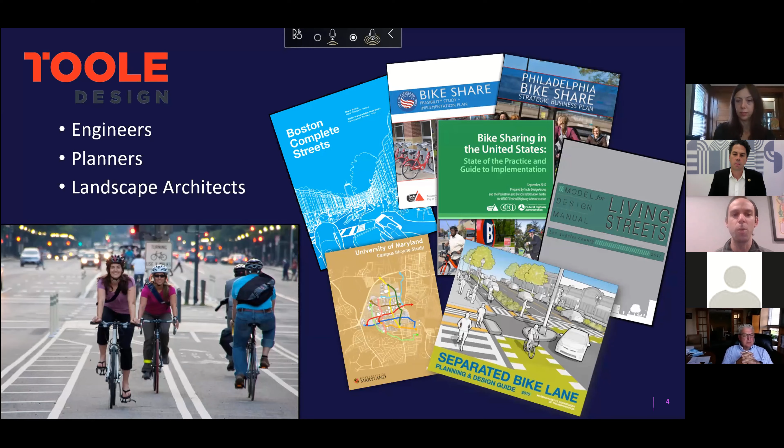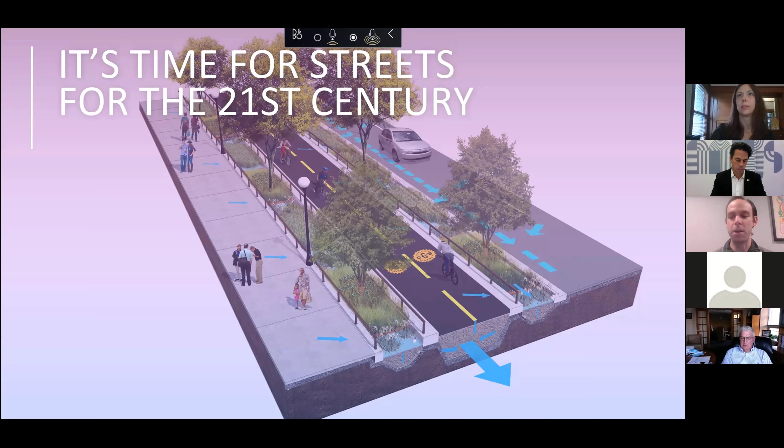Our company, we're engineers, planners, landscape architects. We write a lot of the guidelines and work all over the country, really imagining what can be and then getting it built at all different scales. We do this all over the place, and really it's about making streets what we would consider the 21st century. So it's not about cars, it's about pedestrians, it's about the retail environment. It's also about stormwater and utilities and being better stewards for the environment as well.

Just 4 things I was going to touch on today, really fast: designing for people, integrating green infrastructure in your streets, a few design tips, and then I've always got to do a plug for bikes and peds. For designing for people, it's really about balancing getting somewhere with being somewhere.

I just got your list of towns. I did some Google searches as well, and I picked 3 projects that kind of fit some of the things. One of the easy ones was South Bend, Indiana. Many of you are probably familiar with it. We actually were hired to go there right when Mayor Pete was elected.

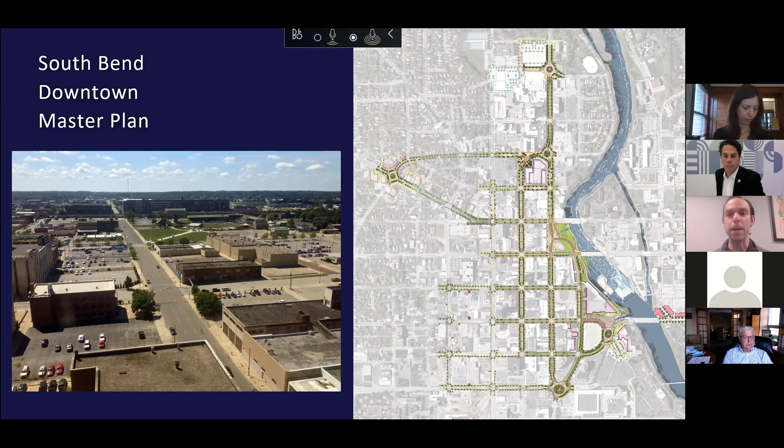When we got there, the picture in the bottom left was basically what their downtown Main Street looked like. We've worked with them for a few years getting their downtown master plan together. You see on the right, where we two-wayed all their one-way streets, and they did road diets and different things to humanize those streets so that streets that were like this before could be transformed to be, again, for people. It's got bike and pedestrian facilities.

It's a calmer street for cars and safer for cars as well. And then, as you can see, the reinvestment came back into their downtown. So if you go there today, it's a much different place 10 years later than what it was when we first got there, and they've just continued to grow the plan as developments come along.

Another town is a small town in Sulphur Springs, Texas, a couple hours outside of Dallas.

When we got there, the picture on the left was their Main Street, and the upper right is the way it looks today. That was the first project we did there. We've been going back to Sulphur Springs about every year or two to do different projects for them. And one that was always bugging us was their square around the courthouse that you see in the bottom right.

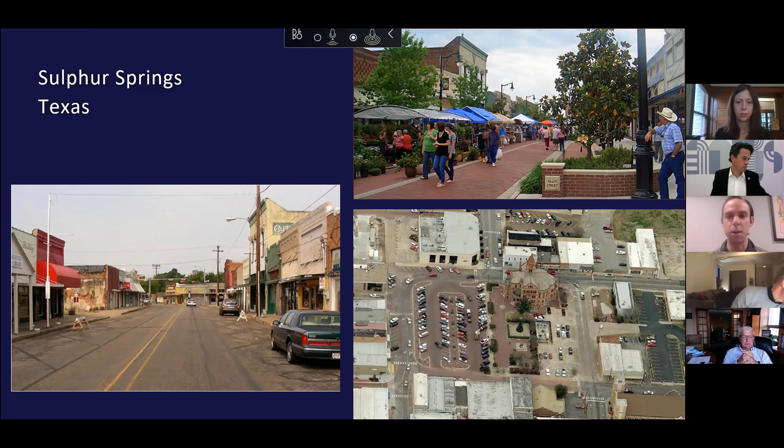And they had a one-way couplet that went through their downtown. As I mentioned, we don't really go to a town unless we remove their one-ways. So we did a quick plan, we did a SketchUp model, we did some concepts, and they built it. And so they restored those streets to be 2-way. We've got lots of tricks. It's not an easy thing, not a snap of the fingers, but we've been around the block, so we've got several tricks of

making one-ways to 2-ways and making great places. And so this Plaza Court Square area that you're seeing, there's no curbs. There's the little parking blocks, but it's a curbless place, so that when you have events and things there, they can shut the whole thing down and have events there.

And so this town that was dead, literally, when we got going there, gosh, again, it's probably 10, 12 years ago when we first started working there, they have over 300 events a year. And it became a place where people didn't say, oh, what do you want to do tonight? Or should we go downtown? They knew if they went to the downtown square, something was happening. So they didn't have to question it.

And so that main street that was empty, as you saw in that after picture, filled up with restaurants, filled up with new stores and retail, and this place is hopping lots of most of the nights of the year, and it's become a destination for people even in places like Dallas to go to on the weekend, on a Friday night, to not have to deal with Dallas or Fort Worth traffic

or anything to actually enjoy Sulphur Springs. Another one, and this was just based on seeing the square there in Shelbyville, a little place called Carrollton, Georgia, where there was a square called Adamson Square. And it's another one where you're doing a lot with a square. Been to Franklin, Tennessee, and done different things there. Racine, Wisconsin's another one that's got a funky downtown square.

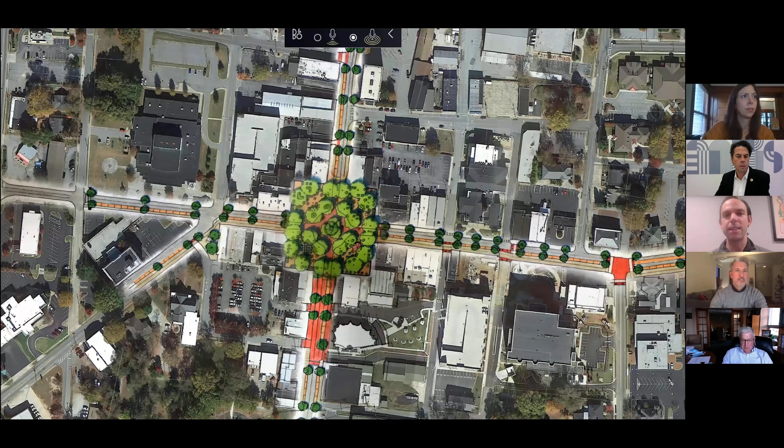But we came in, looked at it, did a quick plan for them. It hasn't been built yet, but we've been still working with them. And here we kind of blew the trees off. It's one of those things where you do a nice plan, you see a lot of green. The images on the left kind of show the transportation functions with the street coming in, how we redesigned it.

And just the big idea was reimagining the corners as rooms. So things like beer gardens, having outdoor dining, things like that, would have been—I wish they had built it 3 years ago when we drew this. They've been getting funding because now in COVID, this would have been perfect to have this much outdoor space next to their square, to be able to have, during this time, outdoor dining and activities.

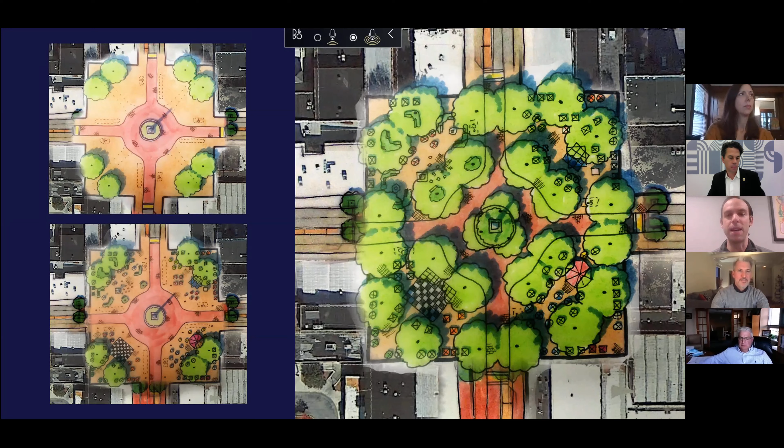But either way, it's still the vision, the town's still pushing for it, and it's something to strive for. So again, it's just one of those things of investing in that public realm and not just giving everything necessary to the cars in these places.

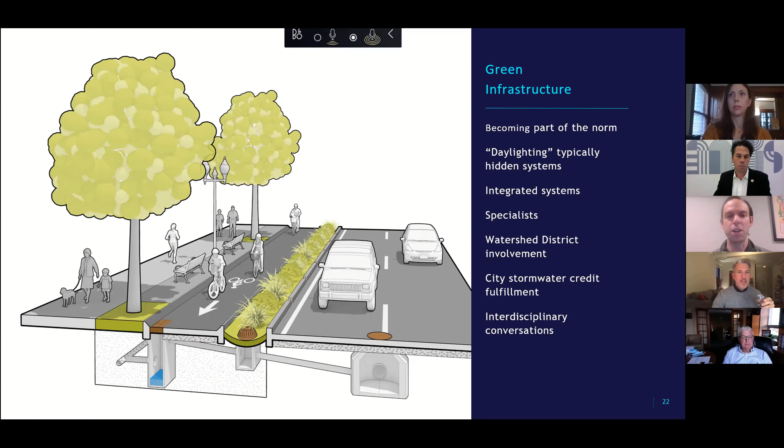Again, green infrastructure, most places are already doing this. We integrate it into most of our projects just because it's an extra funding source that you can also get. And it just helps your infrastructure. A lot of places have dated infrastructure, and stormwater, as far as having something that can reduce the impact of that with projects always seems to help. So we always encourage that and just sell it because it's also an economic thing.

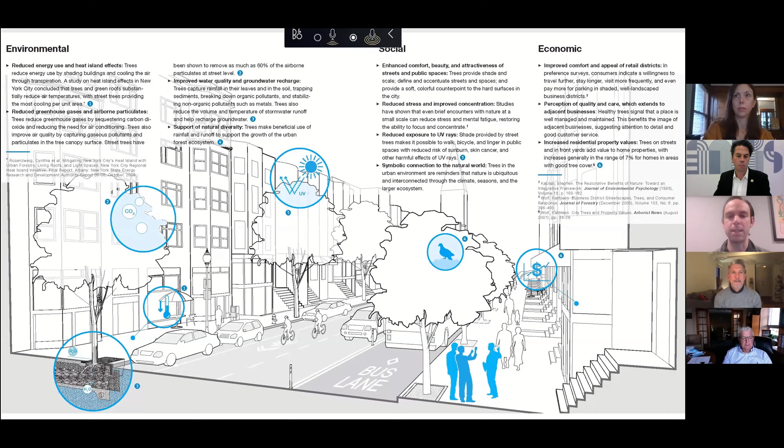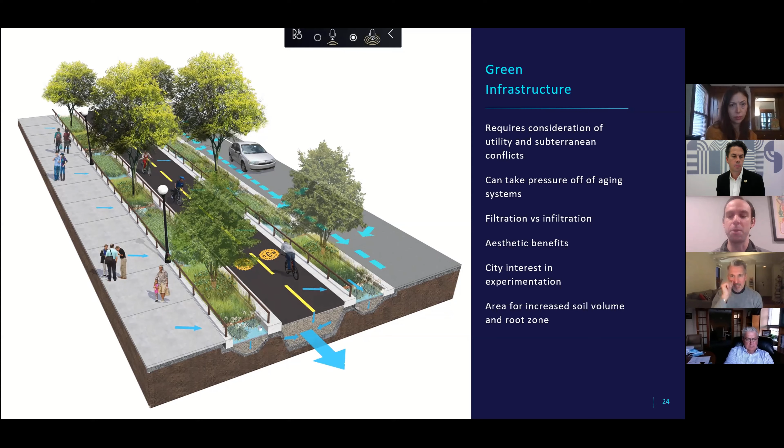A lot of our master plans, we try to at least show how the environmental impacts are also money-making things for the city itself. This is a project we did up in St. Paul, Minnesota, called the Capital City Bikeway, where we did a road diet and reallocated 2 lanes of travel lanes to be a wider sidewalk and bike facility. All of that bike facility and the swales along it are porous, so all the stormwater is collected there. They now have much less impervious space along their streets, so they didn't actually have to upgrade their utilities. Everything was able to be done with the existing infrastructure.

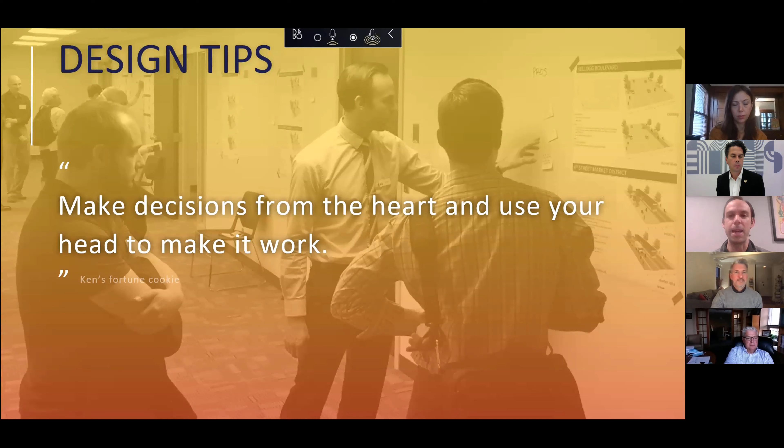This is a fortune cookie I got one time on a charrette, and it said, make decisions from your heart and use your head to make it. That's one of those things, get the vision and stick with it and keep the end goal in mind. So this is that Jackson Street project where a simple cross-section sketch, as you work through the graphics and work with the community, can come to fruition. But it's keeping that goal in mind and living with it.

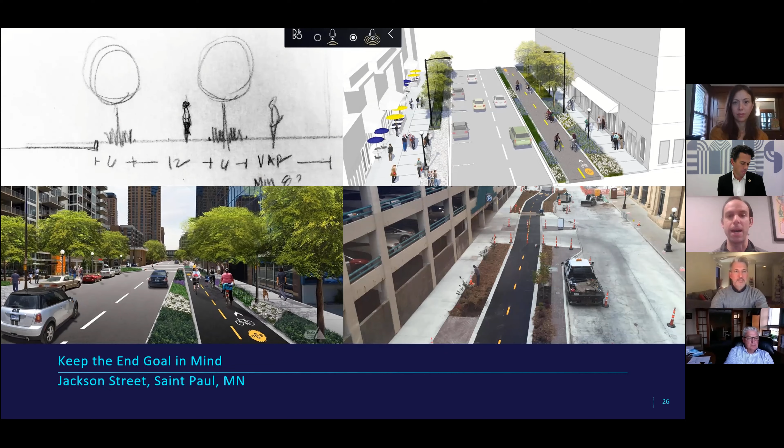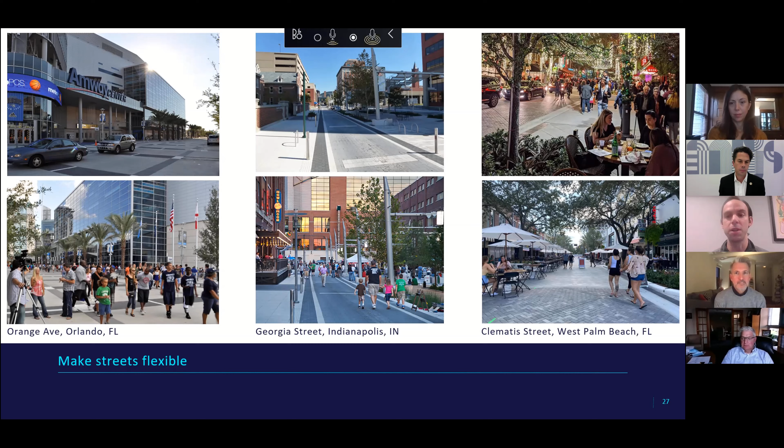Making streets flexible. As I mentioned, that project in Sulphur Springs was flush. We worked on a project in Orlando, Florida, where we made the streets around the Amway Center, their basketball arena, flush. You've got a great example in Indianapolis with Georgia Street, where there's no curbs, which opens up the flexibility so you can do more. The example on the right is Clematis Street down in West Palm Beach, which just got rebuilt. It was fortuitous on their part because this street had curbs before. Now with COVID, they moved all their dining out, and people can walk freely and eat outdoors without any ADA issues or things like that.

And then the last thing, which is almost the canary in a coal mine of walkability: if you can make the place walkable, then ultimately it'll be a success for everyone else. These are 3 examples in Florida that we worked on over the years, and as you do projects, you learn things from them and build upon it. Things like the width of the sidewalk, the width of the dining zone, where you put the furnishing and the trees - we've pretty much become experts at laying these streets out, making them for people and accommodating the cars, but making sure that people and walking is the #1 design driver of our designs.

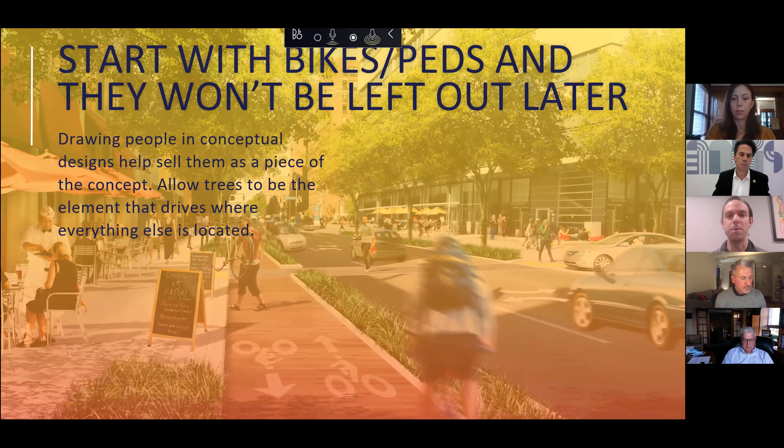And then lastly, like I said, you kind of have to start with the bikes and pedestrians. As a landscape architect, I always say we have to get them in our concepts early so they're not left out. Trees are kind of the same way - making sure that we put in those flashy graphics all the users that we want to be in there.